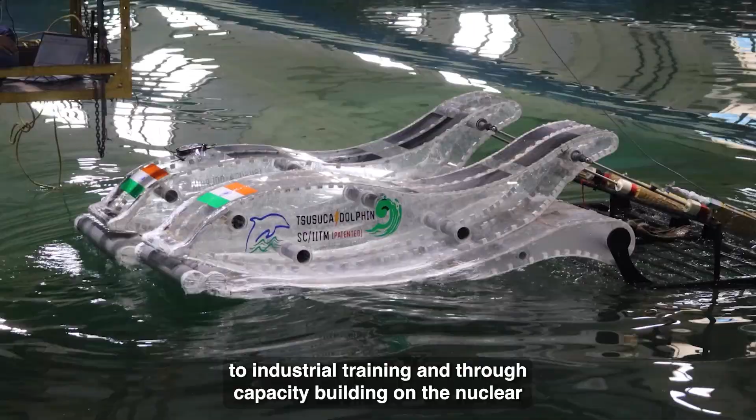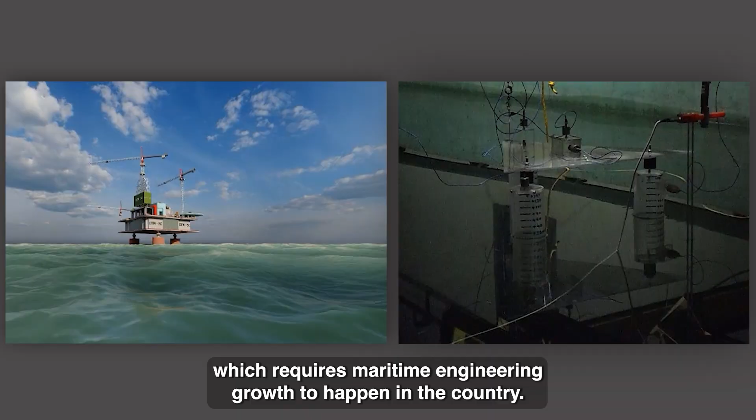This maritime engineering program is a very special multidisciplinary program with input from mechanical, civil, structural, aerospace, naval architecture, chemical engineering, electrical, electronics, and applied mechanics. It is dedicated to industrial training and through capacity building in the new trade of the maritime sector. It's a growing economy that will give a lot of job opportunities and research frontiers as India grows, and the Blue Corridor initiative planned by the Government of India requires maritime engineering growth to happen in the country. This program caters to that expected capacity building.

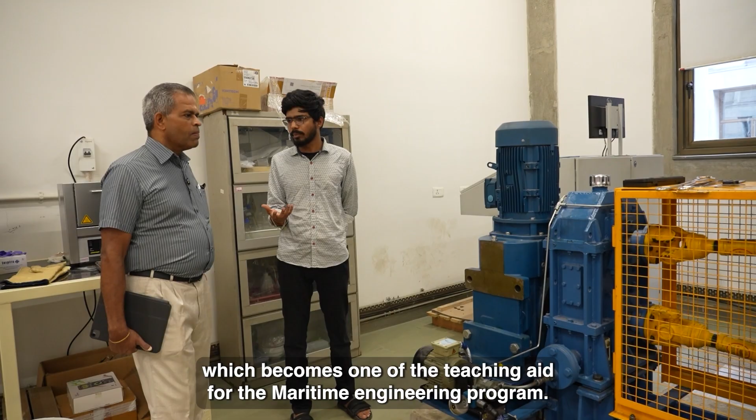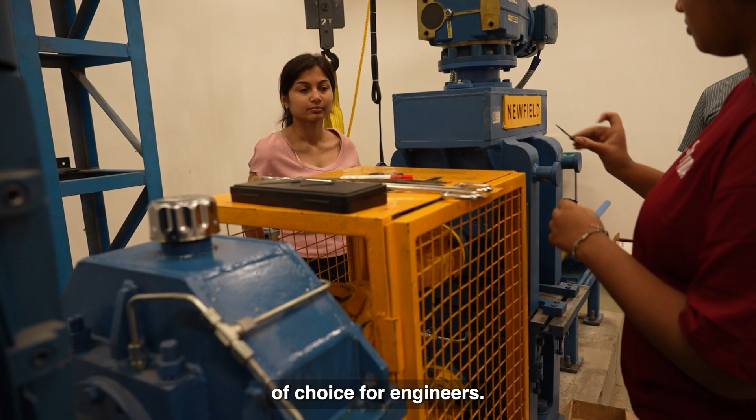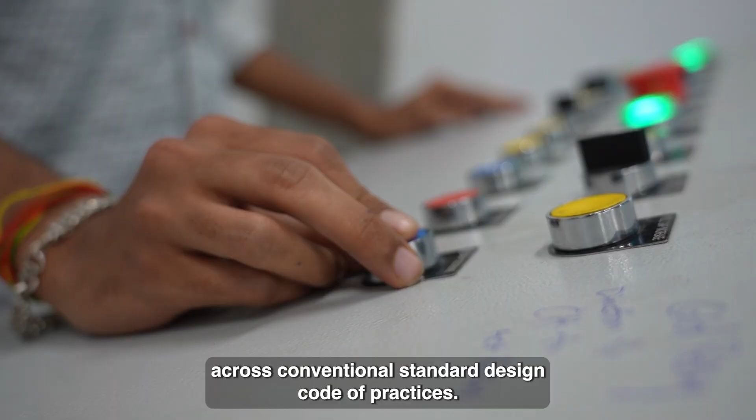This is part of a material science engineering laboratory which serves as a teaching aid for the maritime engineering program. When talking about materials innovation in the maritime industry, though concrete and steel have been conventional choices for engineers, we now have titanium vessels and high-speed craft boats made of fiberglass. These are advanced materials which do not always fit conventional standard design codes of practice.

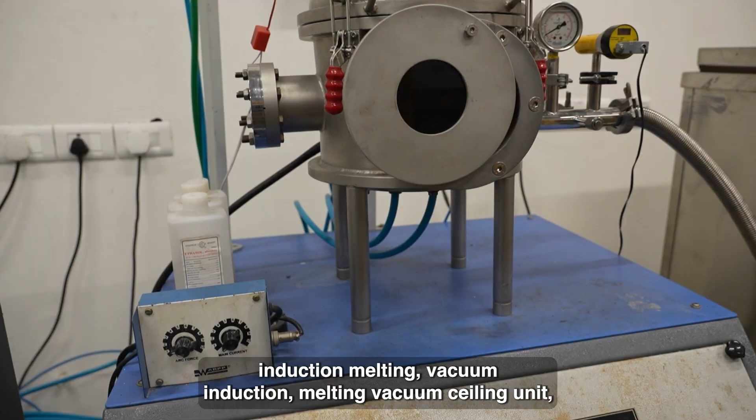We conduct box furnace tests, tube furnace tests, vacuum arc melting, induction melting, vacuum induction melting, and vacuum sealing, all of which are present in this laboratory, a small segment of the material science laboratory.

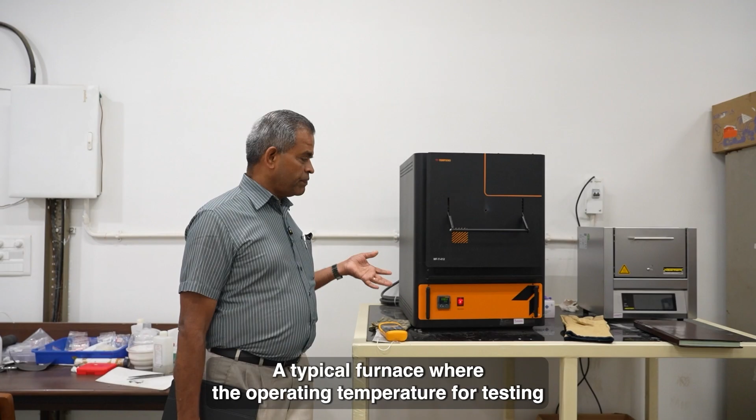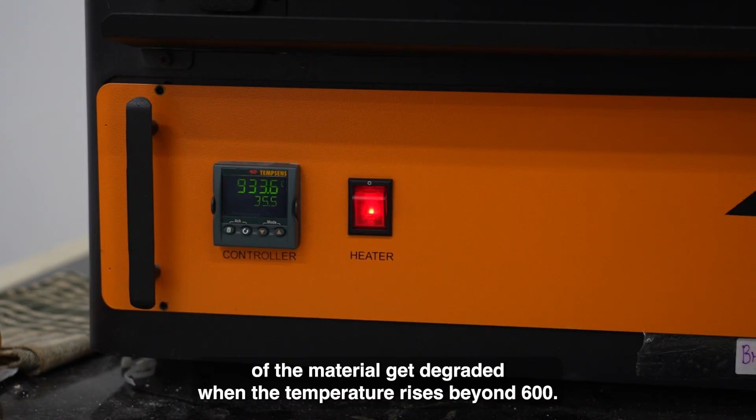A typical furnace here can reach operating temperatures as high as 1200 degrees Celsius for testing specimens. Generally at room temperature and ambient conditions, mechanical properties do not alter much, but as you'll see in the course lectures, the strength of the material gets degraded when the temperature rises beyond 600 degrees. Therefore, when designing for fire resistance, you must choose an alloying element such that the strength doesn't degrade beyond 600 degrees Celsius.

Welcome to the ambience of IIT Madras lecture theatre. This is one of the interesting classrooms where maritime engineering classes will be conducted, equipped with state-of-the-art projection facility and good audio-visual recording systems.

Once the lecture is over, the system here can generate PDF files of the lecture directly and email them to your email ID. It's a state-of-the-art facility at IIT Madras where lectures are recorded for a lifetime and shared with students immediately. This is the IIT Madras library.

The library has all collections of books referred to as standard textbooks and references for the course and program. It also has many online editions of design codes of practice and reference materials, as well as e-collections of video lectures from international courses and programs related to maritime engineering.

We will be taking you around to the advanced material manufacturing units, where you will have state-of-the-art facilities available at IIT Madras. Welcome to the program to join MTech and PhD at IIT Madras Maritime Engineering. Please try to enjoy and take advantage of this to the maximum. Welcome to the program and welcome to IIT Madras.

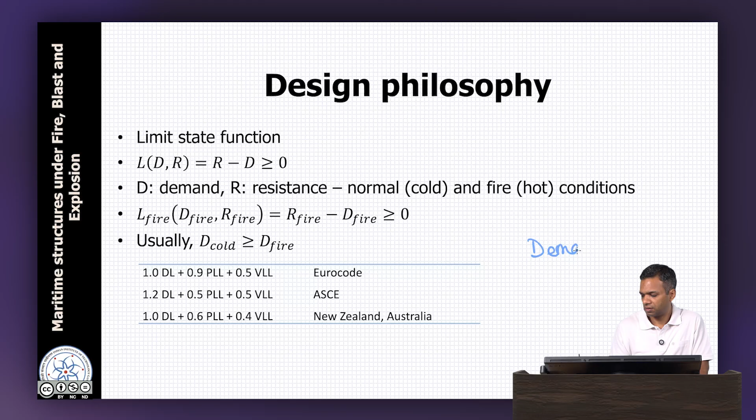Similar sort of logics and provisions are available in other codes, for example in the American code or in the New Zealand and Australia code. So generally the demand during a fire will reduce.

So what we are looking at for design under fire conditions: one is reduction in the load demand. Then second is additional stresses or strains due to thermal effects. We have already seen this, that due to increase in temperature, thermal strains are introduced, and if a system is restrained, then it will lead to thermal stresses, which in turn can lead to failure. So these are the additional stresses or strains which are generated.

We also saw that in case of non-uniform heating, thermal effects can cause additional curvature in beams or columns. The third effect is reduction in strength of materials. We have discussed this a little bit, and we will see in more detail today how it reduces. The fourth effect can be that the cross-sectional areas can reduce.

For example, we saw that for concrete members, due to spalling, the cross-section may change over time during a fire event. Timber structures are especially vulnerable to cross-sectional changes. The other thing to keep in mind is that mode of failures also may change, due to these thermal effects we were discussing earlier, we may have thermally induced buckling or instability.

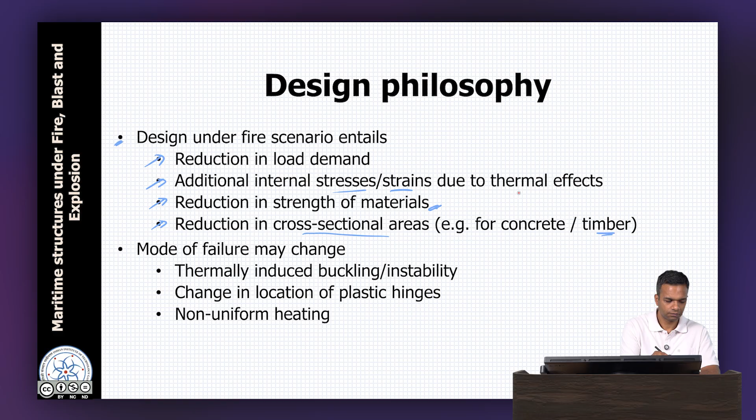Now let's look at some relevant codes that are there for design. So in India, we have the National Building Code. Part 4 deals with fire and life safety. IS 456 is the RCC design code, and IS 800 is the steel design code. Both of them include some provisions for fire resistant design, and we will discuss in the subsequent discussions.

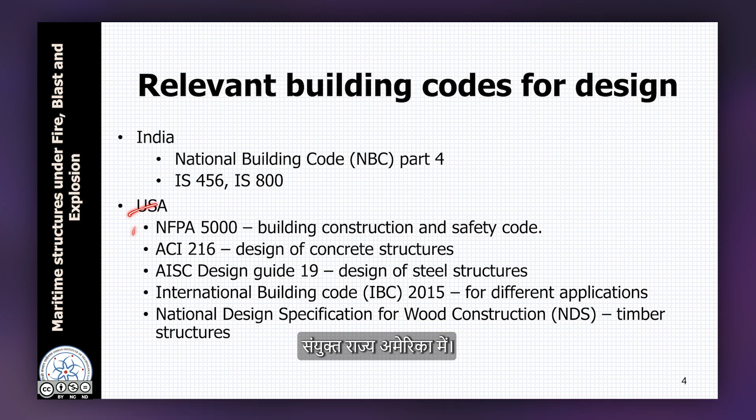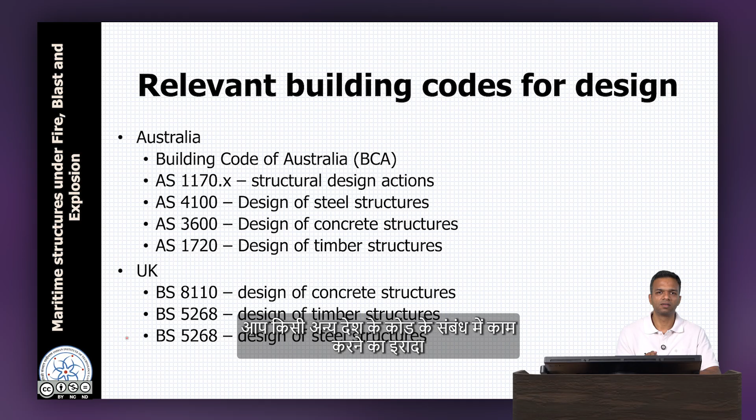In USA, these are the codes. Australia, these are the codes. UK, these are the codes. This I am showing just for reference, so that if you are intending to work with respect to any other countries' codes, this can be a starting point for you.

Canada, these are the codes. New Zealand, these are the codes. And Euro codes, we have been using Euro codes quite a bit, so these are the general Euro codes. The first Euro code gives design basis and actions. For RCC design, we refer to Euro code 2. For steel design, we refer to Euro code 3. There is also a code on composite structures, a code on timber structures, a code on masonry structures, and a code on aluminum structures. So a very comprehensive set of codes are available.

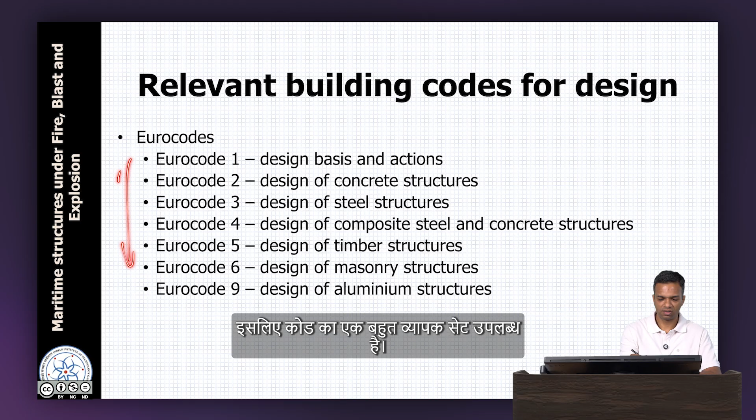Now, before we venture into design calculations, let us look at material properties, because we said material properties change, in fact they reduce as temperature increases. So first, for steel, we will see strength parameters. Generally, what are the strength parameters? They are basically derived from the stress and strain diagram of steel. We know that there is an initial linear period, then yielding happens, then strain hardening comes in, there is an ultimate stress, and then finally failure happens.

So the parameters of interest - one of them is E, the Young's modulus, also called slope of the linear elastic range. If you look at this blue line, this is how Young's modulus changes with temperature. On the y-axis is a reduction factor, we can say a reduction factor KE, which is the Young's modulus at temperature T divided by Young's modulus at some initial temperature T naught, which normally is 20 degrees Celsius. So we can say K_E(T), and this is the reduction factor given here.

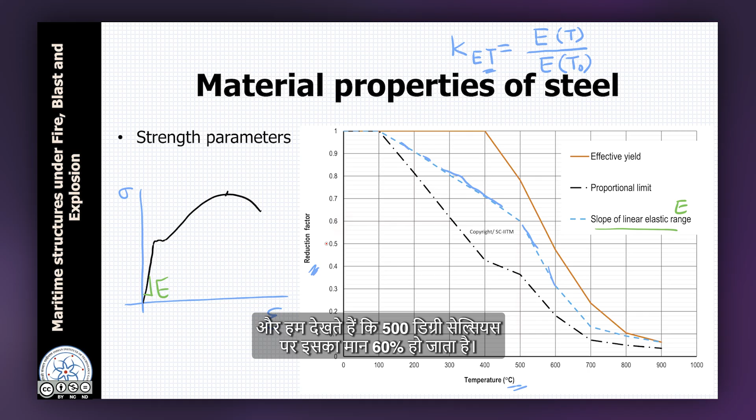So from here what we can say is that up to 100 degrees Celsius, there is no change in Young's modulus. However, after that it begins to reduce. At 500 degrees Celsius, it comes to 60% value, and somewhere between 500 and 600, it goes below 50%, which means the Young's modulus becomes half of what it used to be. We know that for steel, Young's modulus is about 200 gigapascals, so in the range of 500 to 600 degrees Celsius, it becomes about 100 gigapascals.

The other important parameter is proportional limit and yield stress. We look at the yield stress graph, shown here in orange. We can define a reduction factor KyT, which is yield stress at a temperature T divided by yield stress at a temperature T naught, typically room temperature or 20-25 degrees Celsius. Up to 400 degrees Celsius, there is no reduction in the yield stress. However, after 400 it drops very rapidly, so much so that between the 500 and 600 range, it drops by 50%. This is the range where steel loses half of its strength - Fy becomes half of what it used to be at room temperature.

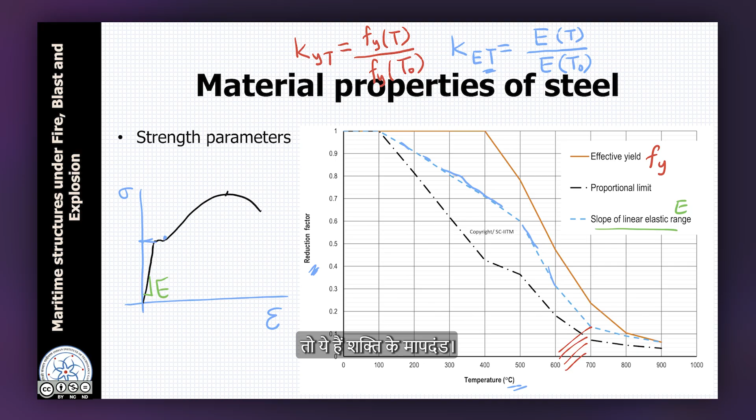So these are the strength parameters. When we were doing calculations with respect to temperature, we were using three main properties: K, which is the thermal conductivity; C, which is the specific heat; and rho, which is the density. Generally, density doesn't change with temperature for steel, so it is considered to be constant.

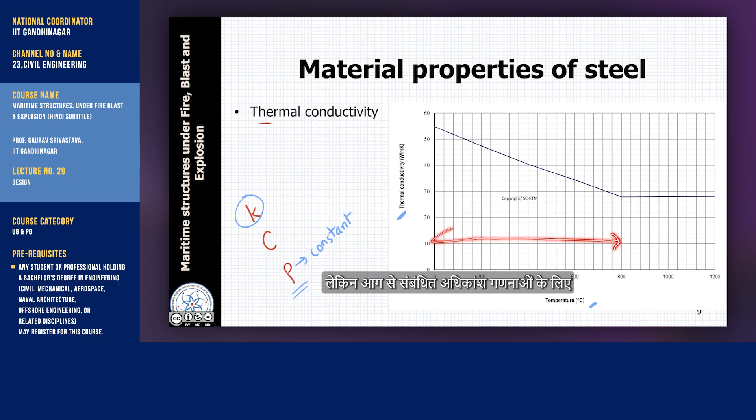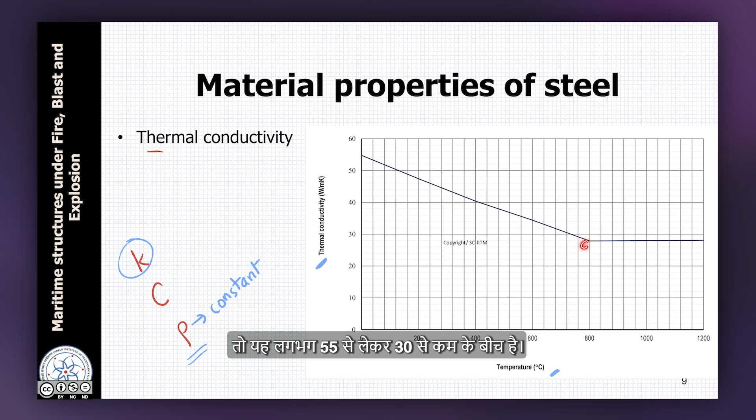For K, the variation of conductivity with respect to temperature is shown in this figure. These are also available in building codes like Eurocodes. At initial temperature, the conductivity is somewhere here, and up to 800 it consistently decreases. After 800 it is about constant, but for most fire calculations it is this up to 800 degree range which is required. The drop is not very significant, but it is there - somewhere 55 to somewhere below 30, so roughly a factor of 1 by 2.

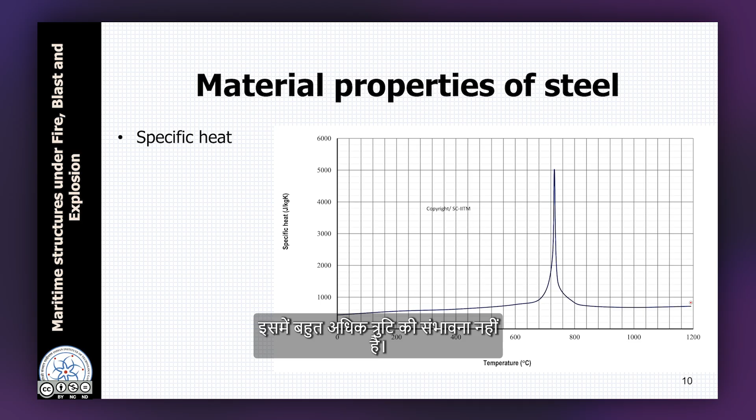Now, with these material properties in mind, let us go to design of steel structures. First we look at design of tension members - members subjected to tensile forces. There are two parts, one is the connection part, one is the section part. It can fail by gross section yielding, net section rupture, or block shear failure. Generally the connections are most of the times protected, so we worry more about the cross section yielding.

Now, for cold conditions, which is the regular temperature design, the design strength or resistance is simply Fy times A cold. Fy stands for yield stress and A cold is the cross section area at that temperature. Under fire conditions, we know that this Fy will get multiplied by a factor Kyt, which is the reduction factor. So Fy reduces, other things remain the same.

Although we have mentioned A fire here, which means we are enabling a consideration of change in cross section with respect to time or temperature, for steel members it is generally not the case. So A fire and A cold are generally the same, and in such a case we can write the fire condition strength as simply Kyt multiplied by the cold condition strength, because A fire is equal to A cold, and the Ky variation is coming from this graph.

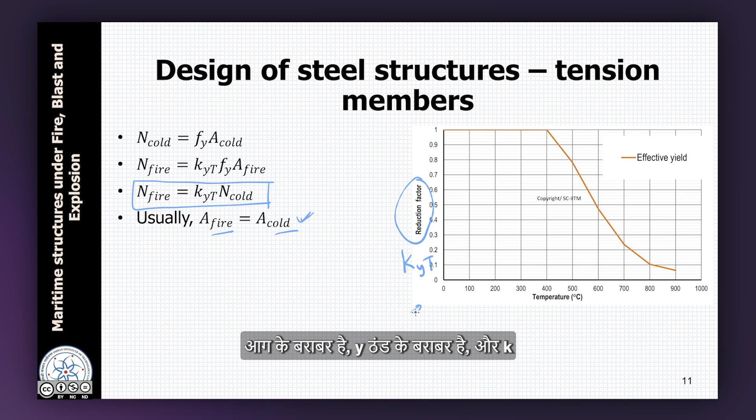Let us look at one example. There is an angle section of this size which is used as a tension member in a roof truss. We want to calculate its design strength in gross section yielding under cold conditions - that is the first thing. This is done anyway. Then if the member is subjected to a standard fire on all four sides, which means four-sided exposure, calculate its temperature and strength as a function of time.

The temperature calculations we have already seen, and I have included it in the form of similar codes we've seen earlier. These are the section properties, this is the material data. C and rho we have considered to be constant - no time or temperature dependence assumed as of now. C is constant at 460 joule per kg Kelvin. Now, this is the initial temperature.

Recall that we are using temperatures in Kelvin because we want to consider the radiation boundary condition. This is the gas temperature, which is 273 plus this is the initial ambient temperature, and this is the ISO 834 relation.

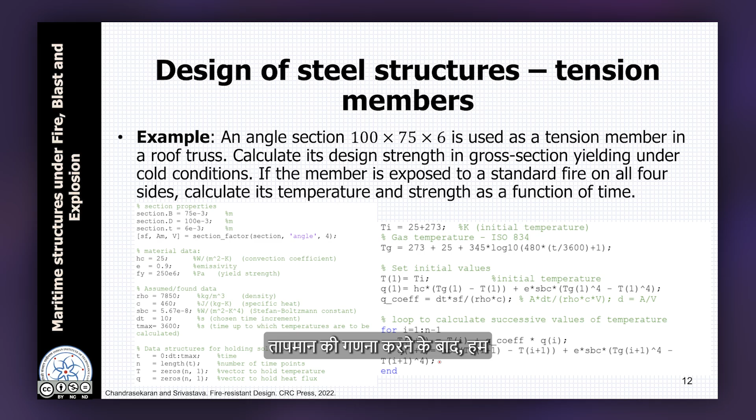The method of temperature calculation is exactly the same as we saw in the previous lecture. After we have done the temperature calculation, then we can do the strength calculation. For strength calculation, what we require is Kyt.

And for Kyt, you may recall we had a graph of this kind, where this change was happening at 400 degrees Celsius temperature, for KYT. Now this data at different points can be stored as a table, and given a temperature you can use linear interpolation to calculate KY. So that is what is being done internally.

Once we know KY, we can first calculate P cold, which is Fy times the area. Here we are using the term V for area of cross section. The area is known, Fy is known, so we can calculate P cold.

You may also notice there will be a material factor gamma m naught with which this Fy has to be reduced or divided, but I am not showing that here because it's understood and we are focusing more on the fire side. The P hot can simply be calculated using this relation: Ky times P cold. So this is all that is required for calculation.

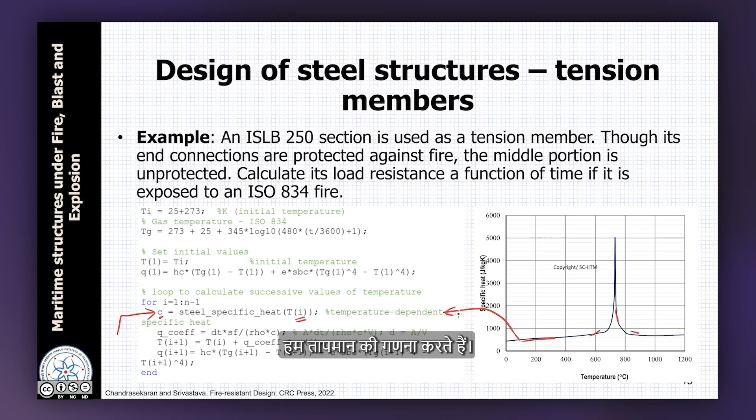Basically, this data is what is obtained here. Using this, we do temperature calculations, and then strength calculations remain the same - we calculate Ky, P cold is Fy times V, and P hot is Ky times P cold. Then we do the plots. These are the relations that we have been working with.

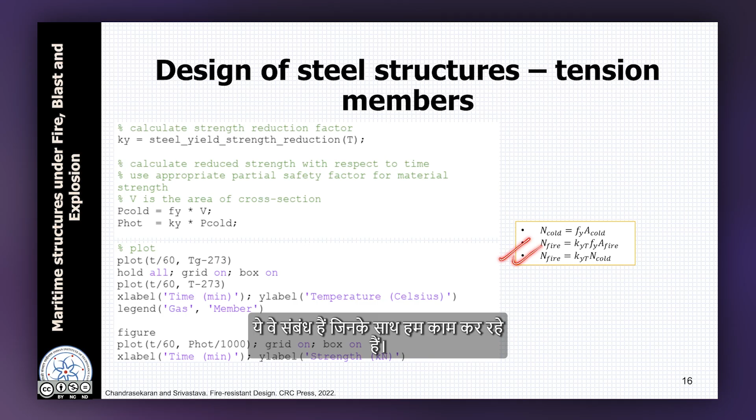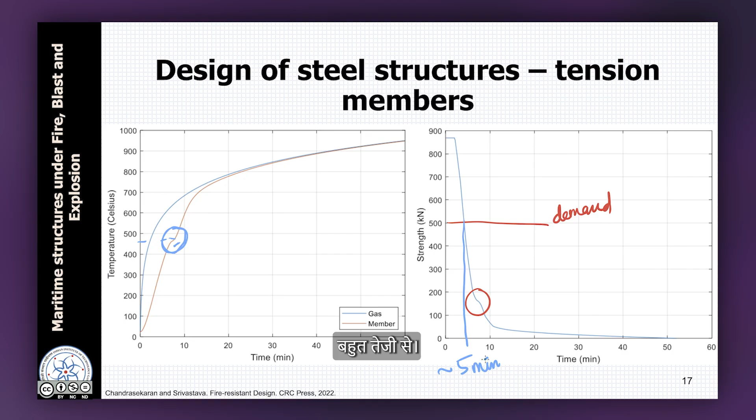So this has to be taken care of in the heat flux that we use in the temperature update condition for the lumped capacitance model that we were using. One possibility is to go into full details, but after doing a lot of such calculations, a simple shadow factor has been defined.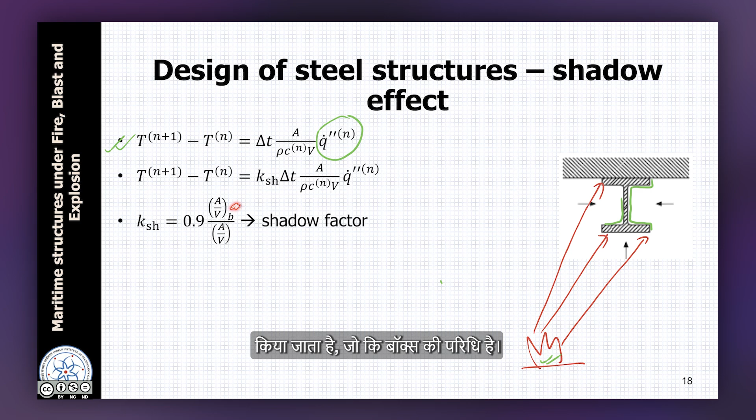The shadow factor is defined as 0.9 times the perimeter, which is the boxed perimeter of the beam, divided by the actual perimeter. Now it is easy to see that when KSH is equal to 1, it implies that we are not considering the shadow effect, so no shadow effect, and this will be on the conservative side.

Why conservative? Because of the shadow effect, the rate of rise of temperature will be smaller compared to the case when we do not consider any shadow effect. This green boundary here is protected from direct radiation exposure, because radiation requires a line of sight for the flux to reach.

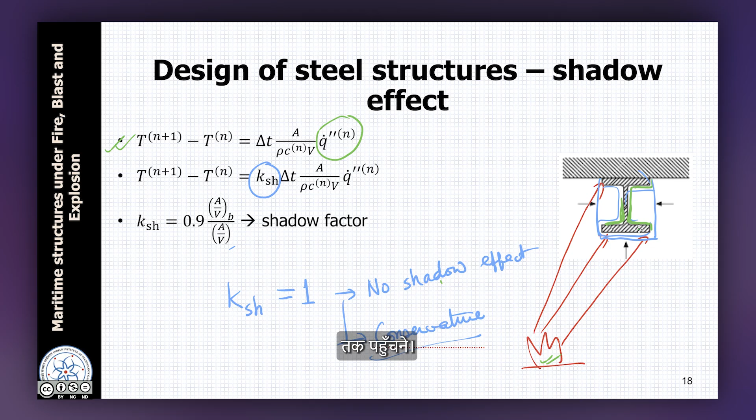Now with this, let's look at design of flexural members. We can divide the design of flexural members into two parts. One is when lateral torsional buckling is not critical, which is the case for laterally restrained beams. These can achieve full plastic capacity. In such a case, M-cold is simply Fy times Zp, Zp being the plastic modulus.

Since the temperature dependence is coming from Fy only, M-fire can again be written as Ky times M-cold. This is similar to what we were writing for tension members, except for tension members we were writing N-fire equal to Ky times N-cold. Here we are writing for the moment, which is M-fire equals Ky times M-cold.

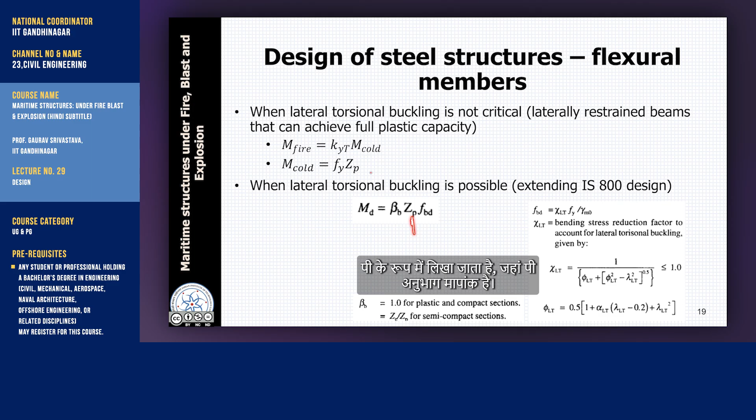Now when lateral torsional buckling is possible, we can extend a similar principle for design. Let us take the IS 800 method for design. For beams which are susceptible to lateral torsional buckling, the moment capacity is written as beta-B times Zp times FBD. Zp is again the section modulus, and beta-B is given here.

Depending on the section classification, if it is Ze by Zp, but for plastic and compact sections which can achieve full plastic moment capacity, this factor will not be there, it is 1. FBD is this stress, defined as the reduction factor multiplied by Fy by gamma-m-naught.

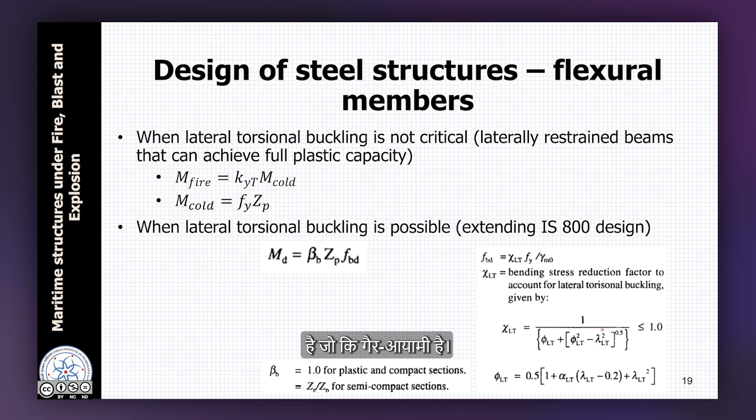The reduction factor is linked to account for the lateral torsional buckling, which is given here. It includes alpha, which is an empirical parameter, and it also includes lambda, which is the non-dimensional factor for lateral torsional buckling.

So again, as this is here, we see that this FBD has Fy, so this is one of the things that will change. FBD-fire will be chi-LT times Fy by gamma-m-naught into Ky. So Fy gets multiplied by Ky.

In a similar way, we can define equivalent fire versions for this reduction factor, and this in turn depends on phi-LT and lambda-LT. Phi-LT has this form, so for this also there is a fire-related version, and here the dependence is basically coming from lambda.

Lambda LT is defined like this. So a fire version can be defined this way, where Fy gets multiplied by K, and the critical buckling stress also becomes a function of temperature, because the critical buckling stress has E in it, which becomes temperature dependent.

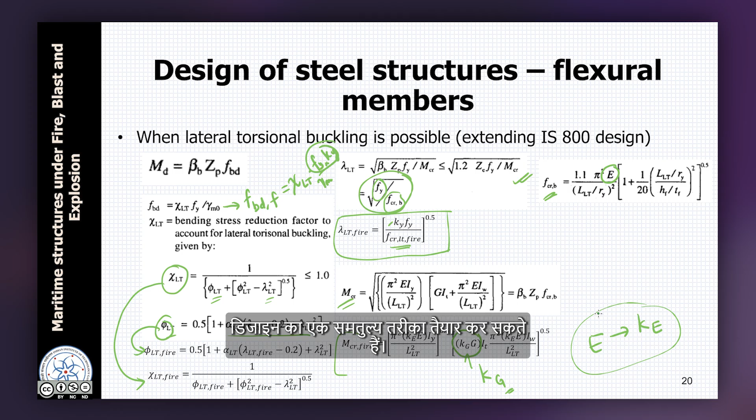By introducing these strength and Young's modulus reduction factors, we can formulate an equivalent way of design using the basic design equations. Now let us look at an example.

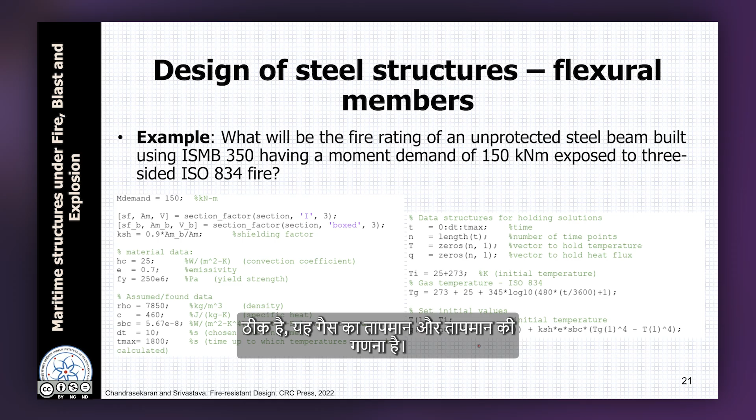We are asked what will be the fire rating for an unprotected steel beam built using ISMB 350, where moment demand is given as 150 kilonewton meter. This again is a similar kind of code to what we've seen, with gas temperature and temperature calculations. Henceforth we will be considering the temperature dependence of C, the specific heat.

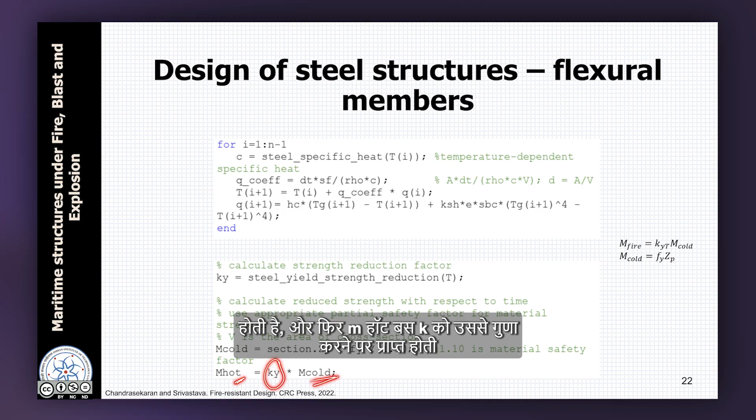Up to here is temperature calculations. Then we find Ky, the steel strength reduction factor. Since this is a beam which can become plastic, there is no lateral torsional buckling case given here. So we simply calculate first the cold moment capacity, which is Zp times Fy divided by the material factor, and then m hot is simply Ky times that, as we've seen earlier.

As we've been discussing, all steel members are generally provided with fire protection. So let us redo the previous example where the beam was unprotected. Using protection now, a 30 millimeter fiber board protection has been given, meaning for the I section all around there is a 30 millimeter board protection.

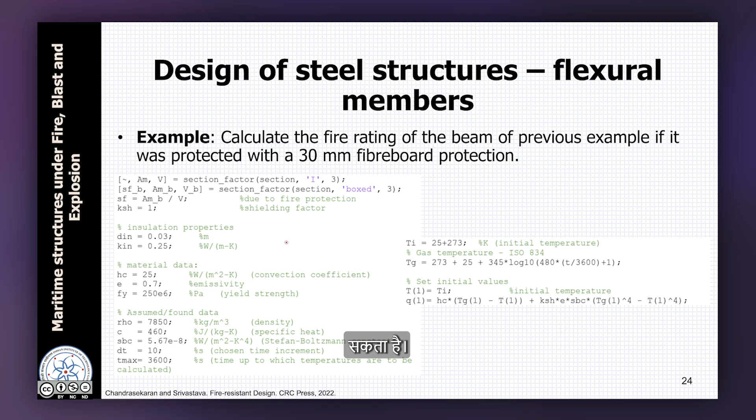So here we define the insulation property for the fiber board. Conductivity and thickness have been defined so we can eventually define R, the thermal resistivity of this fiber board, which can be used for temperature calculations. This is the basic data, similar to things we've seen earlier.

Now this is where R in is used, which we've also seen earlier when discussing temperature calculations. Up to here we've done temperature calculations, and once that's done, the strength calculations do not change — they only depend on temperature through the factor Ky, or Ke if lateral torsional buckling is also in the picture.

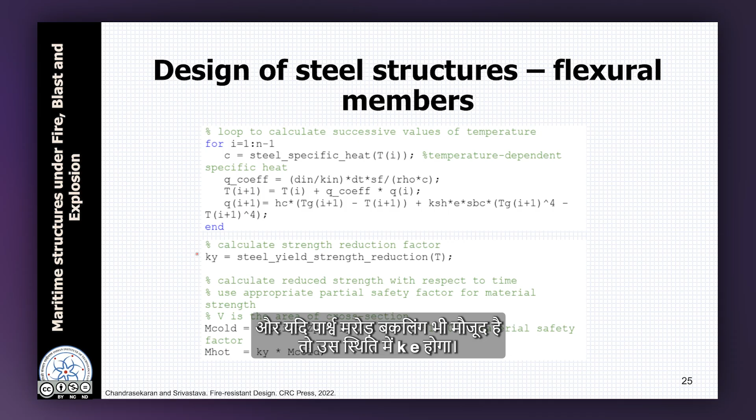Now we plot and compare this with the earlier one. For the unprotected case, 500 degrees Celsius is reached around 15 minutes, whereas in the protected case the same temperature is reached around 55 minutes — a substantial increase.

Similarly, we plot moment capacity. The demand again is 150. What we can see is the fire rating is roughly 24 minutes — so from 6 minutes it has gone up to 24 minutes by adding this 30 millimeter board protection.

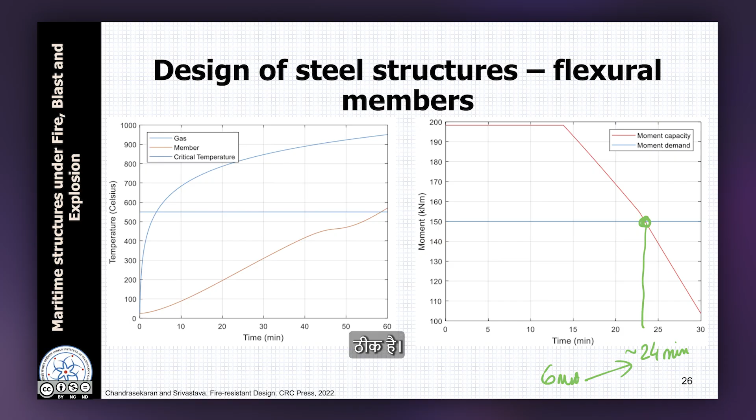With this, let us move on to design of compression members. Compression members can fail by crushing or by buckling — these are generally the two modes of failure.

In case of crushing, this is the critical stress. In case of buckling, this is the critical stress, where the critical stress comes from Euler's buckling formula, pi squared EI divided by L effective squared. And this P fire, the actual load carrying capacity, can be written as this multiplied by these two, where the factor chi is based on the buckling class.

Here we have already converted them to the fire versions, starting from the cold condition versions. Where lambda has the slenderness ratio, and here E — instead of E we write Ke times E, where Ke brings in the temperature dependence of Young's modulus.

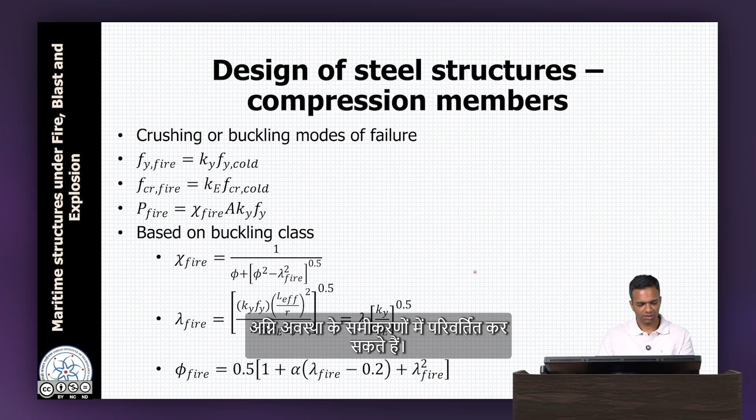Instead of Fy we are writing Ky times Fy. This brings in the temperature dependence in Fy, giving us the temperature dependent slenderness ratio. Similarly we define phi from here because it depends on lambda. So like this we are able to convert the cold condition equations to fire condition equations. Now let us do an example of a compression member.

A column having an effective length of 4 meters is designed for a factored load of 1500 kilonewton. This is the demand using ISMB 450. We calculate its fire rating if it is subjected to standard fire without any fire protection.

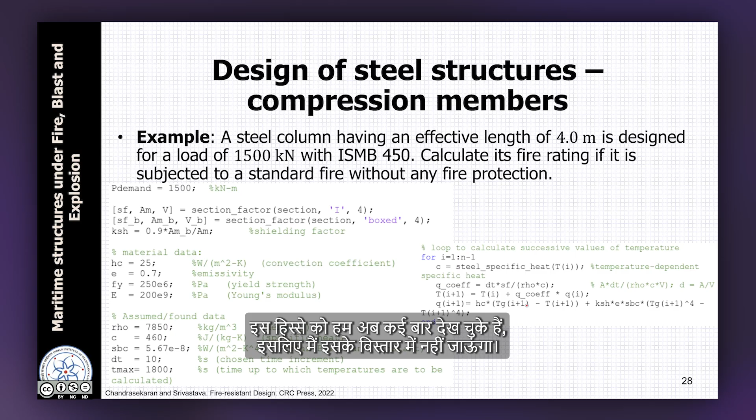This part we have seen now multiple times, so I would not go into the details. This is basically all temperature calculations. After temperature calculations are done, we can go to the strength calculations. In this case we will need Ky and Ke both, which are the strength reduction factor and the modulus reduction factors as a function of temperature.

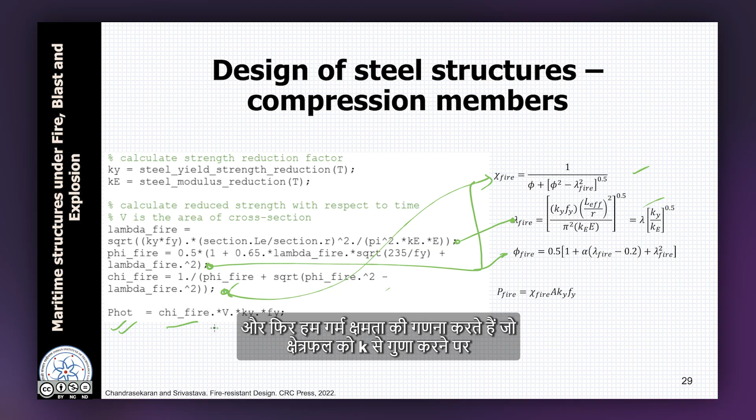Then we calculate the required quantities: lambda fire is here, phi fire is here, and then chi is here. Whatever these expressions are, using that we code it up, and then we calculate the hot capacity, which is this times area times Ky times Fy.

As earlier, we plot two things: one is temperature versus time, and one is load capacity versus time. You will continue to notice this kink here, happening again because of the specific heat being considered as a function of temperature instead of being constant. Now for this particular case, the demand is 1500 kilonewton, and that demand is crossed again around the 7-minute time frame. So we see that the fire rating of this column without any protection is 7 minutes.

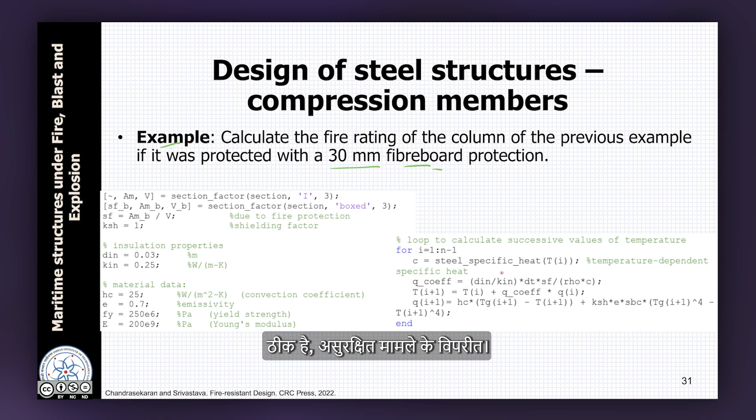As earlier, let us repeat the example, but with a fire protection of 30 mm fireboard. Again, we will define insulation properties as earlier, which is for the fiber board. We use these properties to calculate the rise in temperature, which will be more gradual, as opposed to the unprotected case.

This one shows the structural calculations. We have already calculated the rise in temperature, so this part basically doesn't change at all. The Ky and Ke dependence is brought in using the appropriate functions. Then lambda fire, phi fire is calculated, and then P hot is calculated in the same way as earlier.

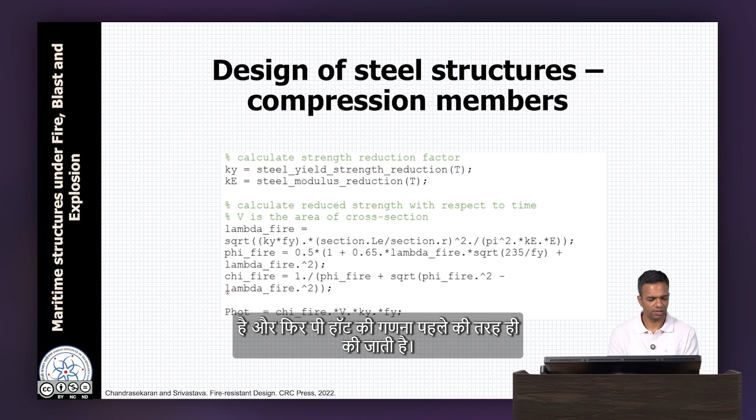Now let us look at the temperature and strength. We compare this temperature again with the previous one. We notice that at 60 minutes, the steel temperature is around 500 degrees, whereas in the previous case, at 30 minutes itself, it had reached almost 800. So this is the effect of fire protection. Because this temperature rise has slowed down, the strength reduction has also become more gradual.

So in this case, can you find out what is the fire rating? The demand is here, 1500 kilonewtons. What will be the fire rating? It is the time at which the resistance, or the capacity, crosses or comes below the demand — that is the fire rating. In this case, the fire rating is about 20 minutes. So now from 7 minutes earlier, it has gone up to 20 minutes. This is the effect of adding insulation.

Now when we are designing structures, we will look at this problem in reverse, which means we require a 60-minute rating, and we need to find out the amount of protection. So we need to design the protection for a given rating.

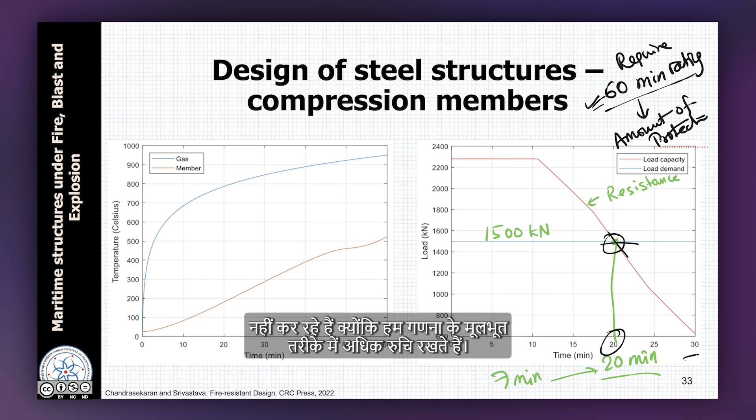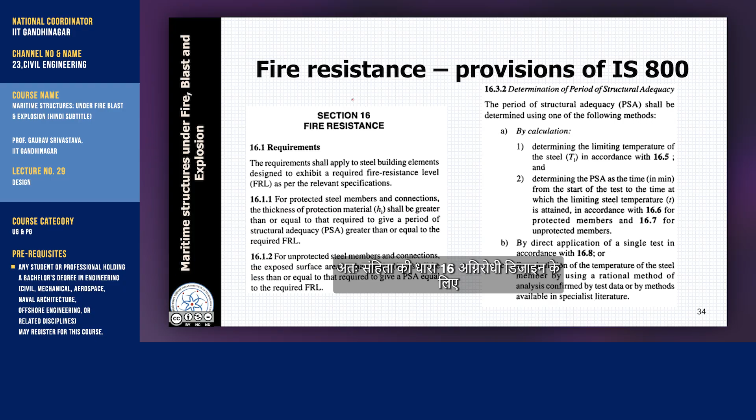Now that we know about the method of calculations, let us look at some provisions of IS 800-2007 which are already there in our Indian code for fire resistance design. Section 16 of the code gives the requirements for fire resistance design.

There are some terms defined here. The basic terminology is that the requirements shall apply to steel building elements designed to exhibit the required fire resistance level, FRL, as per relevant specifications. For protected steel members and connections, the thickness of protection material shall be greater than or equal to that required to give a period of structural adequacy.

This is another term, period of structural adequacy, which is like the fire rating. Whatever is the fire rating required, it is always measured in time units. For unprotected steel members, the exposed surface area to mass ratio, which is like the section factor, shall be less than or equal to that limit. So basically it is saying the same thing, whatever is the limit state, it has to be satisfied.

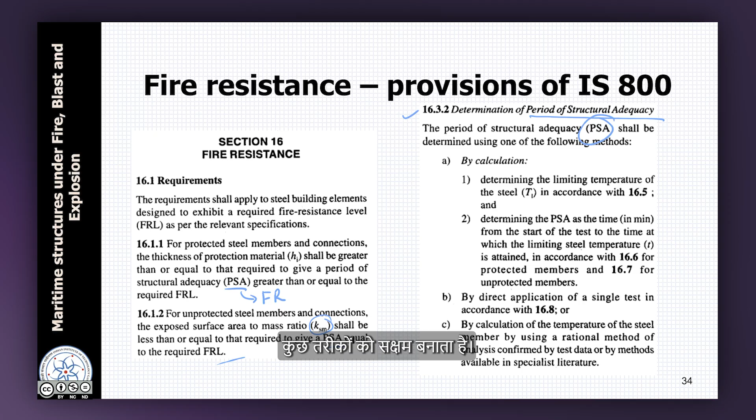Now how do we determine PSA, period of structural adequacy? There is a clause on that. The code enables a few methods of design or calculation of PSA. One method is calculation of the temperature of the steel member using a rational method of analysis confirmed by test data or methods available in specialist literature. These methods, which we have learnt for calculation of temperature and strength, have been corroborated from experimental data for a long time, and are also available in several building codes including Euro codes. So the method of calculation we have used so far falls in this category.

The other possibility as per IS 800 is by direct application of a single test, which means we take the structural member along with its fire protection and do a test. The method of testing is also defined. The third method is by calculation, given in IS 800 itself, for limiting temperature, which we will see shortly, and from there you determine the PSA time in minutes.

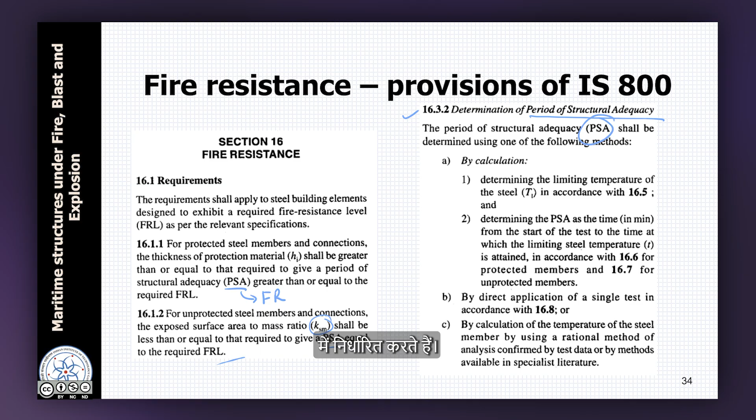The curve that we have used in the calculations so far is given in the Euro codes, so they are also code based, this is also code based. When you do actual testing and data collection, obviously there will be some variations from what we have been considering.

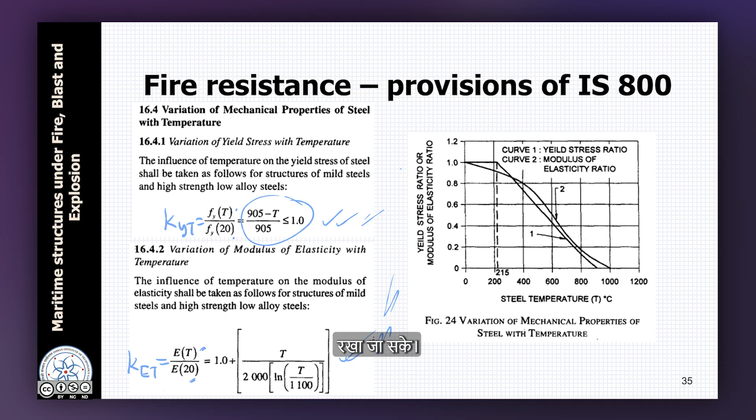Then limiting steel temperature, as discussed, is mentioned in the calculation of the performance level. The limiting steel temperature given here basically depends only on RF, the ratio of design action on the member to the design capacity.

Let us go back to the example we did earlier, of the column. There, P demand was 1500 kilonewtons, and the P resistance or capacity was 2350 kilonewtons, and this is the cold capacity - the design strength and ultimate strength of the member at room temperature, the cold condition.

From here we can calculate RF, the ratio, which comes out to 1500 divided by 2350, equal to 0.64. We put this RF value in, and from there we get a limiting temperature of 905 minus 690 multiplied by 0.64. This limiting temperature comes out to 456.5 degrees Celsius.

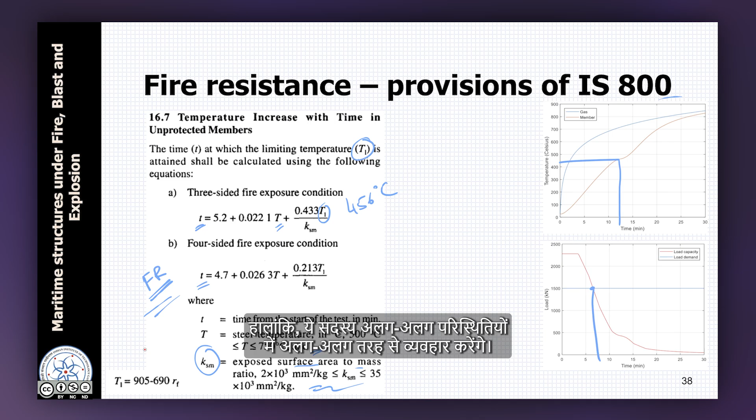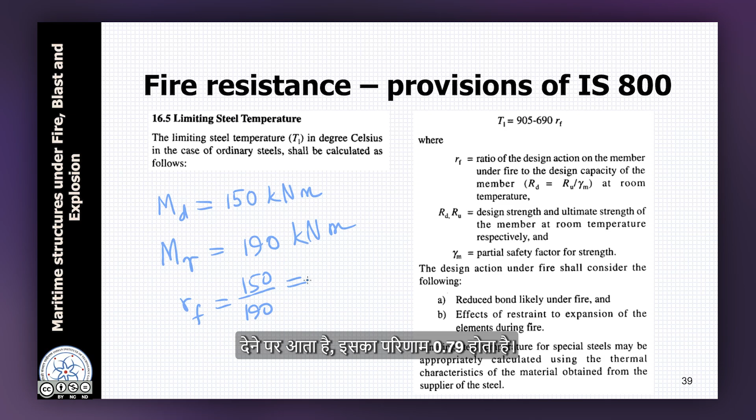Now we can look at the other example for the beam, where we had M demand as 150 kilonewton meter and M resistance was 190 kilonewton meter. So this RF, which is 150 divided by 190, comes out to 0.79, and putting this RF here, the limiting temperature comes out to 360 degrees Celsius.

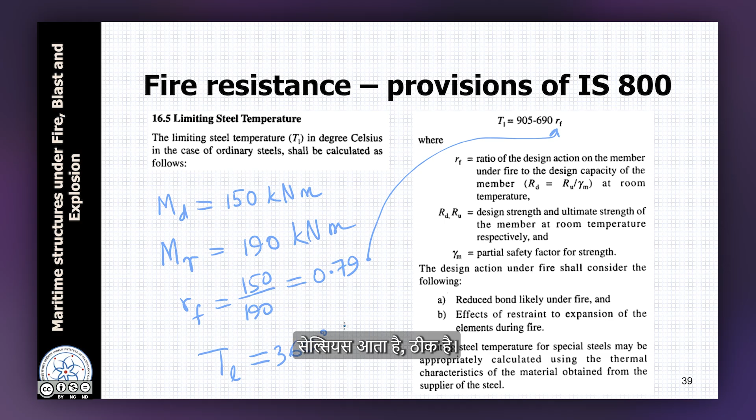So for this limiting temperature, which is 360, the fire rating would come out close to 8 minutes. What we can notice is that in this case the fire rating is closer to the calculated fire rating, that was around 6-7 minutes.

So this particular approach or formula has an advantage in the fact that it is very simple to use. But the disadvantage can be that depending on the member type and depending on the RF ratio, the results may be on the conservative side, or the results may be on the non-conservative side. It depends on the calculations.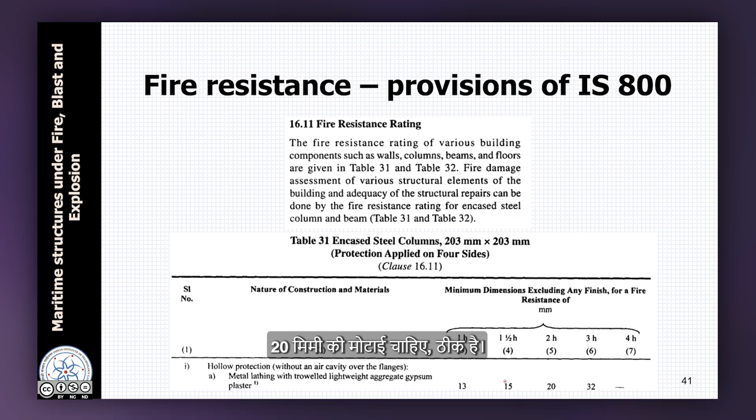Similarly, there is this table 31, a larger view of the table, where you will see that there is a provision of plaster board using bricks of clay, asbestos, etc. So for different fire protection and for different requirements of fire resistance, one can find out what is the required millimeter thickness of the particular protection.

However, as we discussed, this kind of approach also suffers from similar limitations as earlier, in that there is no dependence on the level of load. So if under cold conditions the capacity is very close to the demand, then under fire conditions such members will fail faster. Whereas if there is a large amount of capacity available compared to demand, then such members may fail much later in fire.

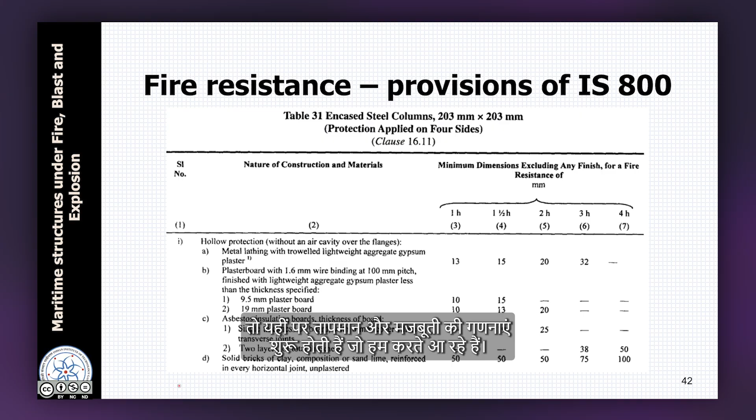So this is where calculations of temperature and strength that we have been doing are very important.

So to summarize what we discussed in this lecture, one was the design philosophy and the limit states, and we saw how the demand reduces because of the difference in load factors. We discussed material properties of steel under high temperatures.

Then we discussed design of steel structures using detailed calculation methods for tension members, flexural members and compression members. Similar to the temperature analysis approach, we developed some computer codes which can be directly utilized for design. And finally, we discussed some provisions of IS 800-2007 for fire resistant design.

We saw that there are some empirical calculation approaches available, and a couple of tables are also given which can be utilized for directly finding out the required thickness for protection.

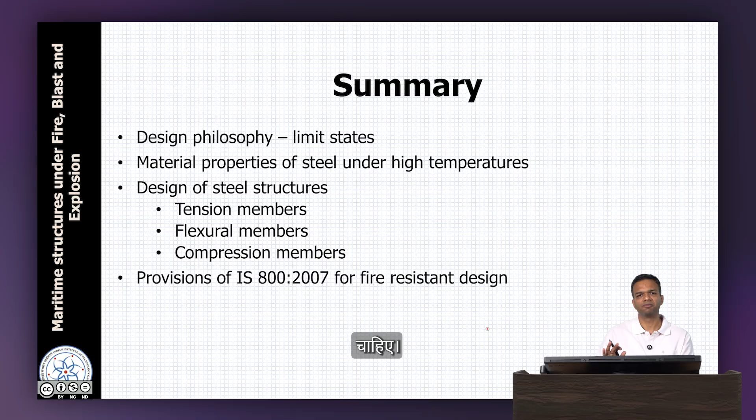So overall what can be said is that for steel structures, unprotected steel structures have extremely small fire rating and are never to be used in any significant structure. So wherever there is a fire risk, steel members of the structural system must be protected with fire protection, and fire protection design can be done using the calculation methods that we have covered in this lecture.